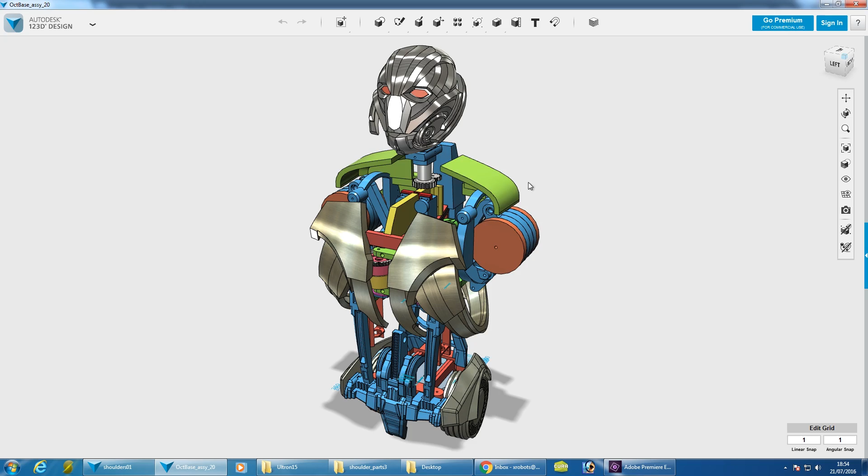First of all, I'm going to make these green shoulder parts that we've got here, and hopefully that'll immediately give it some better proportions. There's quite a lot to go in the front, the clavicle that goes on these parts, and also the neck conduits there, and I think once I've filled those in, that'll set it off quite a lot, and of course the breastbone.

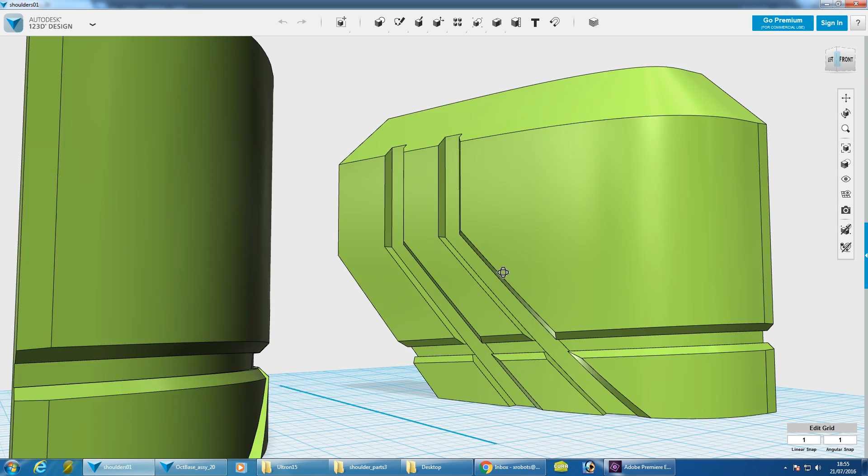So I've extracted those parts off to a separate project. I've put a bit of surface detail in them, but not too much. They are in fact partially covered by much bigger shoulder bells that sit on the arms as well, so they just need some detail to set them off. And I'm pretty sure I can print those in one piece each on 2 of the LulzBot TAZs.

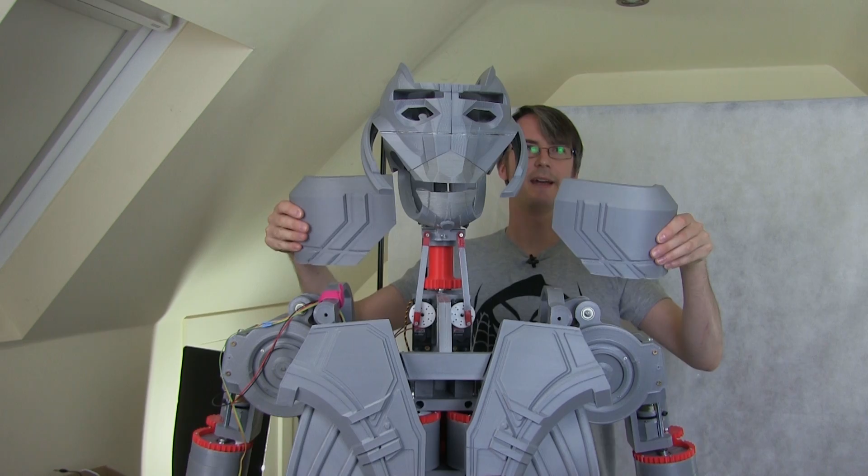Here they are. So these fit on here. They need to go slightly higher and point in at the neck. So obviously this brings up the height of this much further. So already the neck doesn't look quite so long. And as I say, there's lots of stuff in front to fill in the big gap as well. So we need to mount these on some brackets.

There's a bit of a challenge with these because these shoulders pivot around this way. And they also kind of go in, so if I attach it to the tops here, these are going to collide, because when the shoulder's right up, this thing touches the neck. So we need some means of keeping this here, but allowing it to come up, allowing this to slide up underneath it, and it also to pivot round whilst it's doing that.

So I think what I'm going to do is build a bracket, rather than picking it up this way, it's going to hinge it up from the back, possibly even on a 4-bar link that always keeps it parallel, but still allows it to pivot round at this point, somewhere near the pivot point for the shoulder, so that it can come round and go up and down without going up at a funny angle.

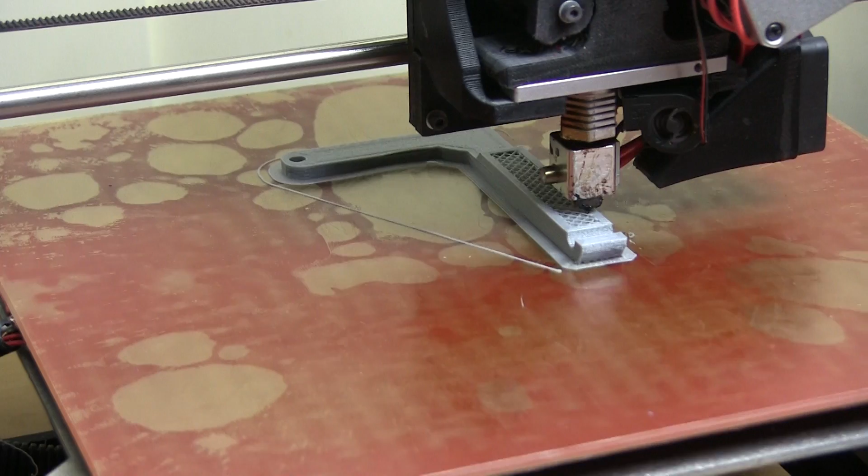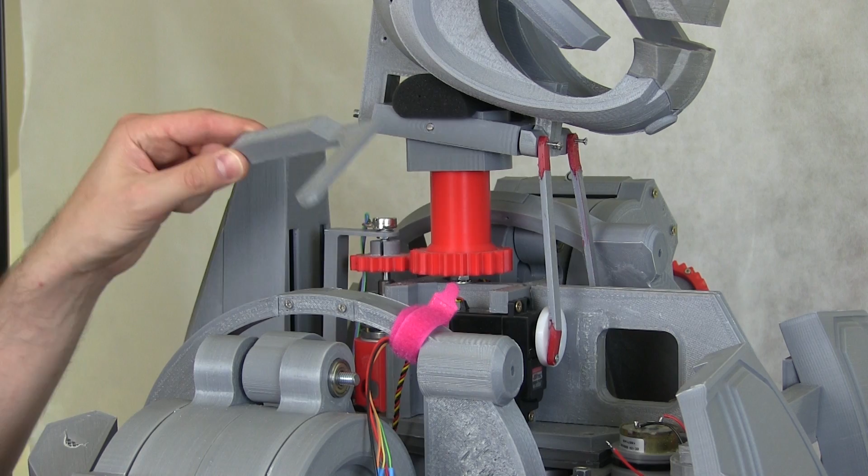I've made one bracket here which is L-shaped, and that's going to pivot off this back thing here. So that'll attach to a bracket so it can go up and down, and then obviously the pivot point in the end is where the shoulder bell part will hinge off there, so that will then be able to rotate around. So I need to make a block to hinge this part on the back here at the right spacing, and then I think that's going to be okay.

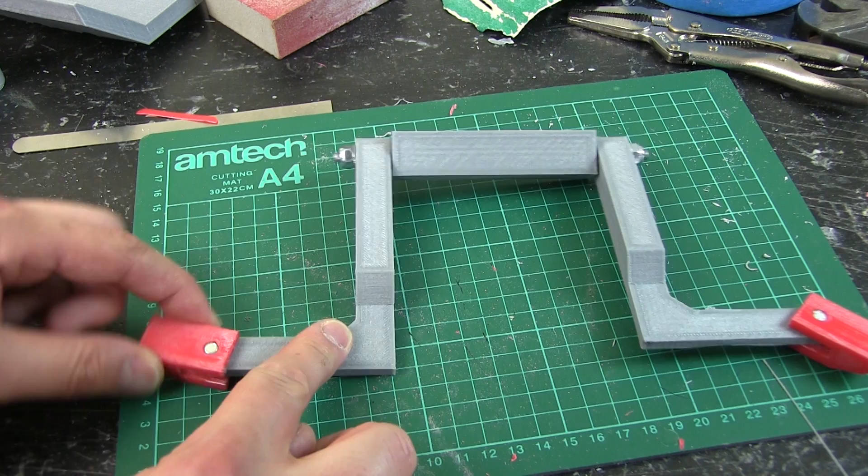I've already tried it on the other side where I've put the shoulder right up, so I can check that this can actually lift up and clear all of the mechanism. So here's the assembly. We've got obviously the hinges that go that way, and I've put these little hinges on here. These stick to the bottom of the shoulder bell parts.

So I've got these little bits of studding with a slot cut in the top that I've just screwed in. They're tight in the red part and slack in the grey part, so those should rotate okay. They're a little bit stiff, but they've got the leverage of that whole shoulder panel on. So let's get this stuck on and mounted up, and we can move the robot around a bit and see how well it moves. I fitted these on here for now with the brackets. They look alright now. It makes the head look less high. These will sit slightly higher as well.

So already the neck doesn't look so long. Obviously all the front of this is about to get filled in this episode as well. So obviously these can lift up as the shoulder raises, and they can also swivel round to track the shoulders. So if we just give one of these a shove.

Now the pivot point isn't in quite the same place, but obviously the range of motion is fine, and there are big shoulder bells that come over here as well, so that's actually going to overlap this piece, and that will be fixed on that assembly there. So what I do need though is underneath here kind of a springy piece and a channel attached to the top of this. So I've got kind of a springy stick that sits in the channel, so this will always track the shoulder there and keep that in line, and also as this raises up it won't get caught on any of the pieces underneath.

But I really like to do that when it's in motion. I may come back and do that in this episode, or it may be in a couple of episodes when I've actually got some scripts that run all the motors, so I can really see how this performs. I still have the option to change the shape and size of this angled L-shaped bracket. I could have it so the shoulders slope down more. We'll really have to see how that works when it's in motion. For now, I'm really happy to get the cosmetic parts on and build up these shoulders.

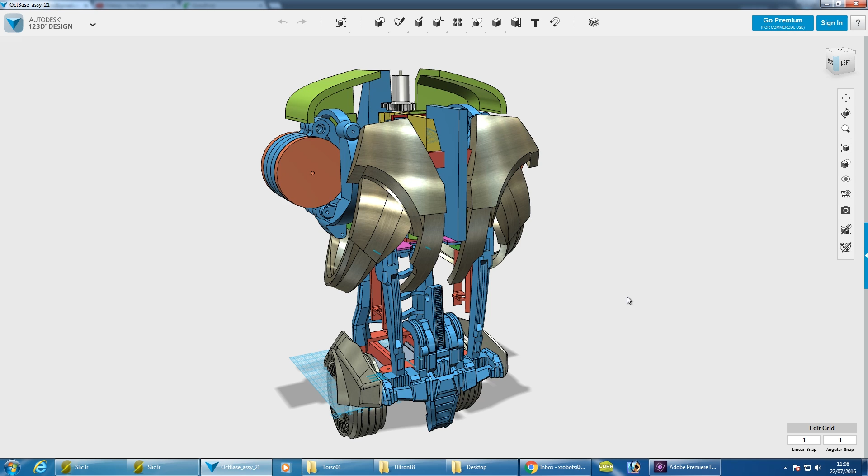And the next thing we're going to look at is the breastbone, which is of course called the sternum. So let's have a look at that sternum. We have to make a piece that fits in between the original chest plates, and I've got the model here, in fact, the low resolution version without the details on, because 123D Design handles much better if there are fewer faces. So I've basically put this block in here, which I've sized, and it's just got square edges. It overlaps the other parts.

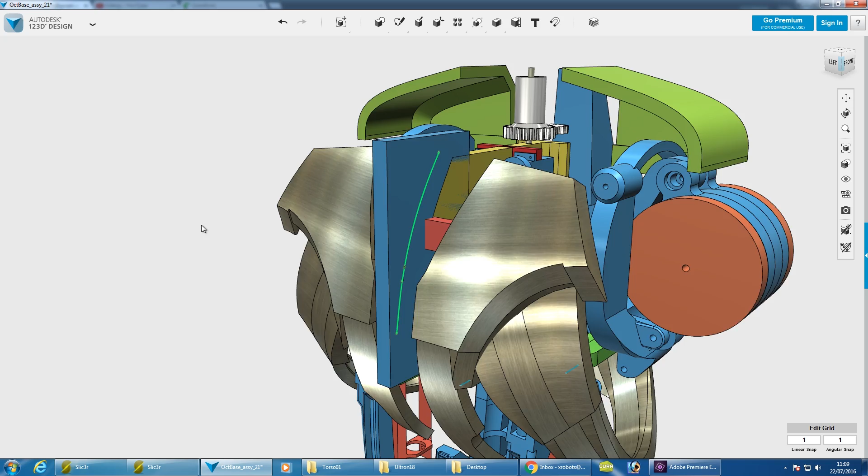What I'm going to do is use the project tool to project onto this surface with these contours, and then use those sketches to cut that line, and we can get something that's completely uniform with the front of the chest. Similarly, we can subtract these other parts and we can get that cutout piece. There it is, and I've done a bit of contouring to the bottom just to make sure that comes down to the right distance. Probably do something about this surface, but we can sort that out shortly. I've made that slightly wider and stretched out the bottom to meet these parts.

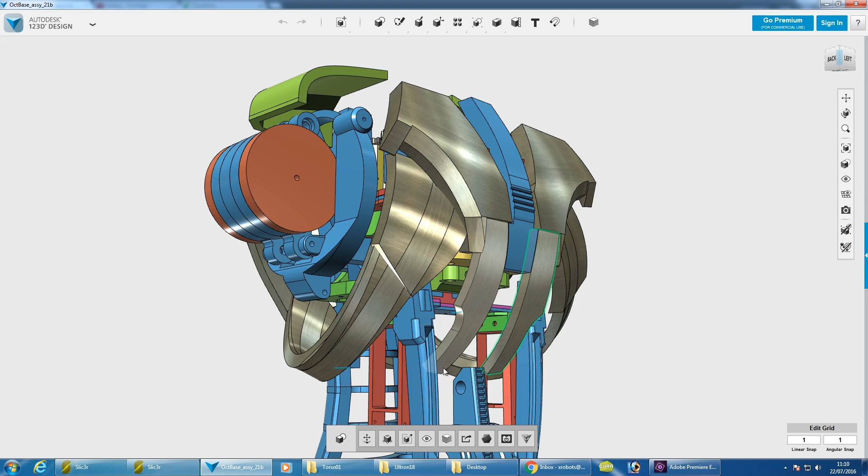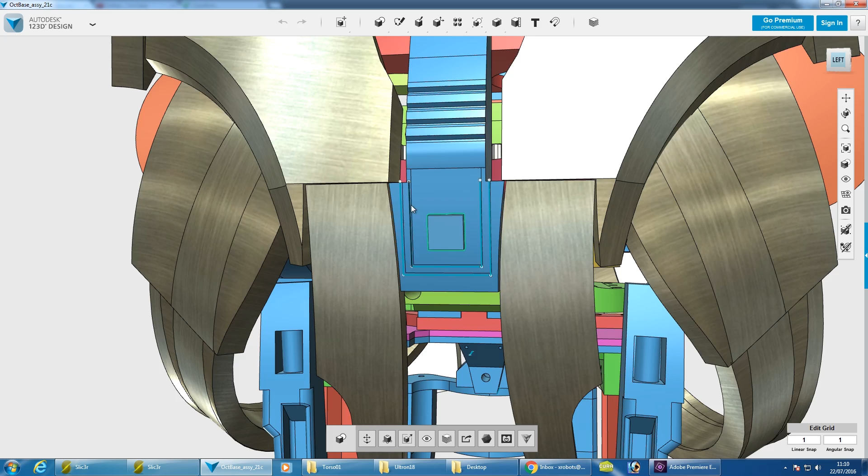Now the parts either side I haven't printed yet either, and I'm not going to do that till the robot's moving, because they may well interfere with the bottom, so I need to decide if those are on hinges or they're flexible or something else. I've put some details in here, and I did that by snapping a cube to this and using that surface to draw on. I need to do some more details, so here's the cube I've just got from the primitives menu, and I've just snapped that to the surface. Then I've used that to draw the sketches on, so you can only draw a sketch on a flat surface.

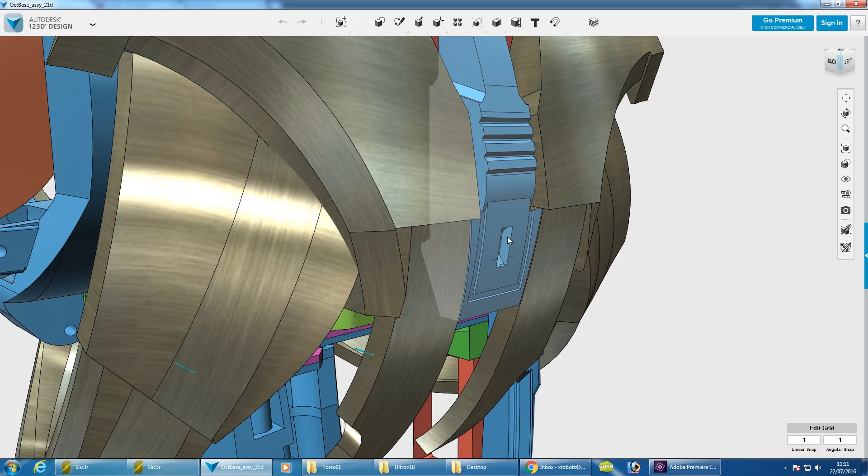So I've used that cube, you can see the sketch is slightly further away, and then I've used the split face tool to project those sketches onto the curved surface underneath, and I did this quite a lot with the other previous parts. A bit more detailing and contouring though. I've cut another hole out there and put some contours up here. I've stretched the top out here as well, and that needs to be contoured in multiple directions, and we can do that just by grabbing the corners here and chamfering those out. A few more chamfers on the corner.

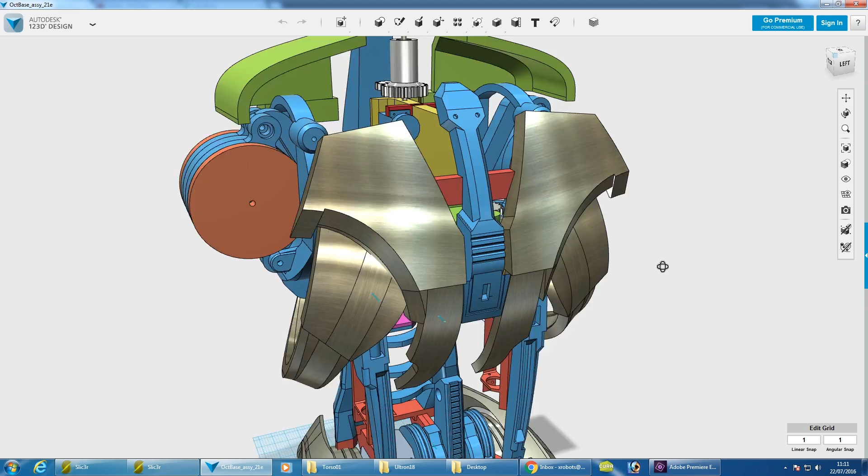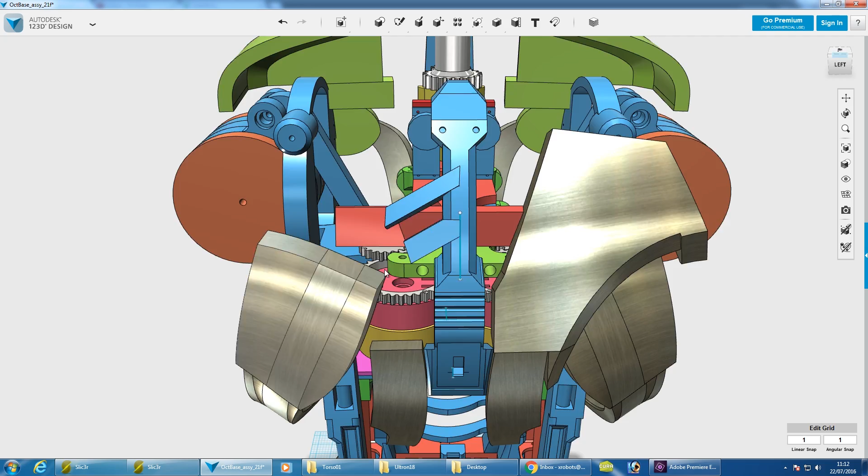I've dealt with that top piece, put a couple of holes in for features. Seems to be looking okay. There's some extra bits that go on that kind of cut down, and some other bits and pieces as far as I can see from the reference pictures. Started to position these parts, so these are at the moment independent pieces, but obviously what I'll do is subtract this part from it using the subtract tool, so I can just do this and I can cut that off so it's perfectly flush with that other part.

Those are all merged together now, and I've gone and flattened the tops off, and I did that just by pulling this surface in and out. So that's pretty easy to do to get the top there. Same with the one here. So those are all merged in, it's all one solid object now.

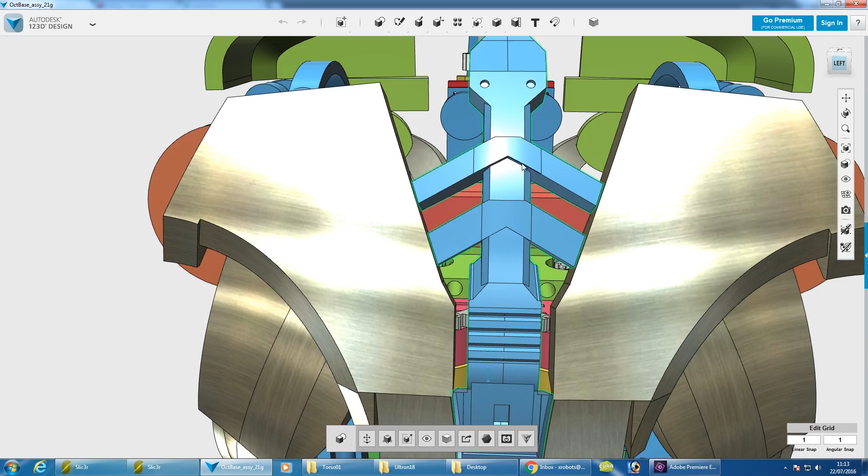And there's a few more features, and I think we'll get that printed and see how it fits before we do any more. So I've added these round things on, which are just going to be stuck on the existing chest plates. A bit more contouring up the top, a few more flat faces, and I've cut this whole thing in half, ready for printing in 2 halves.

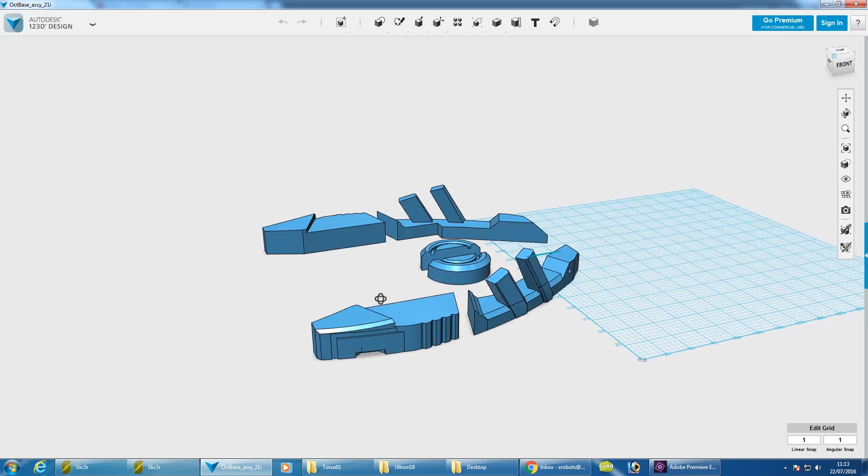Here are the parts ready for printing. I've had to cut these lengthways, and obviously stick them back to back there, so that will get printed and they'll be stuck back to back, and that's so it fits on the print bed.

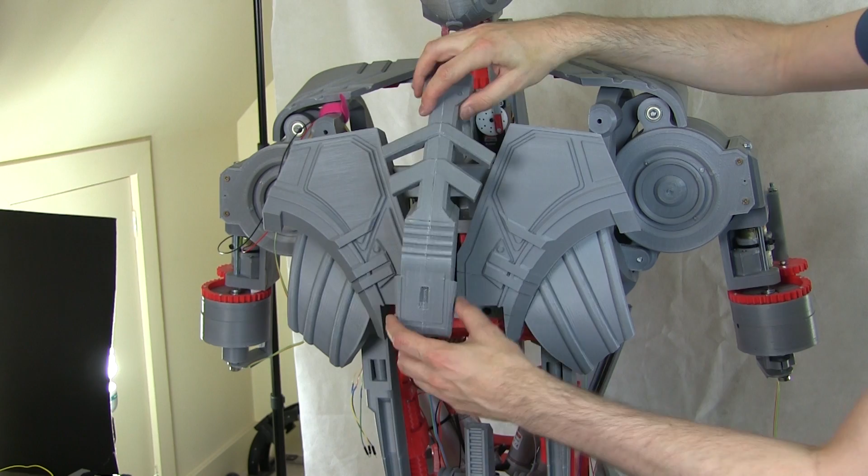Here are the parts. I've already solvent welded with acetone these parts back together, all 4 of them. So that should be our whole sternum and those bits and pieces that sit up on the top on each side. I seem to have one slight problem, which is that this doesn't fit at all. In fact, this is supposed to be below here, which is fine, but then the top doesn't fit anymore, and this doesn't fit onto here.

It wants to fit up here, and you remember I made these pieces removable, so this should sit at this height. So in fact, I think what I need to do is move these chest plates up so it fits like that. Basically, I made these removable, fortunately, and it looks like they are too low compared to the CAD by about 20 mil. So I need to shift those right up, and that's another reason why the neck might look too long. So I need to cut the brackets off the back, and then print some new ones and move them down and shift those chest plates up a bit.

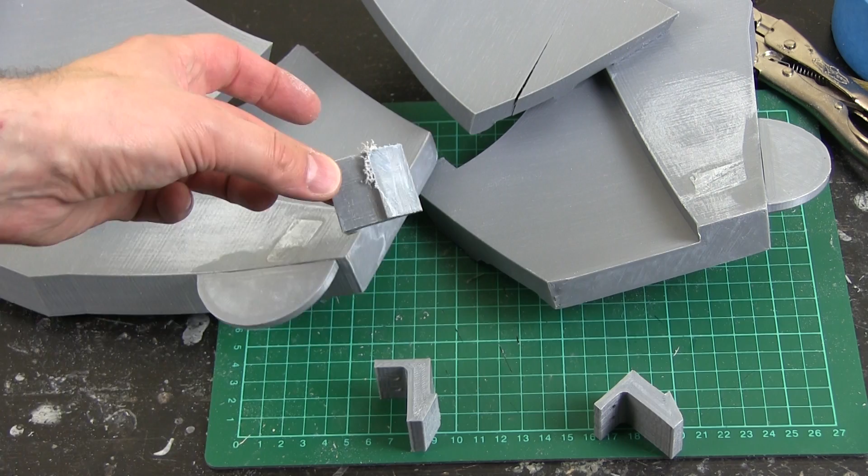I just hacksawed off the old tabs that were on there, and I've printed some new ones, which I now need to place further down so these can sit higher. I've stuck the new brackets on, so these should fit on pretty well. They should hook on and they also screw on, so let's just place those. There's one, and there's the other one.

So I've just taped this thing on with double-sided tape for now, but I think that looks pretty good. It seems to be in the right place now at least. Just need to secure these with some screws to hold them in exactly the right place, and that should be fine. Right, I think that looks okay. Can shift this around, but on the whole that seems to fit as intended.

I've designed these sections for the conduit, and they've got holes through the outside to put a bit of bungee cord through so they can be flexible. Obviously these will be stacked up. And I've also got a big hole in the middle with a gap in the back so I can easily feed wires in that go up to the head. So these can be the actual functional conduits to bring all the wiring into that head assembly.

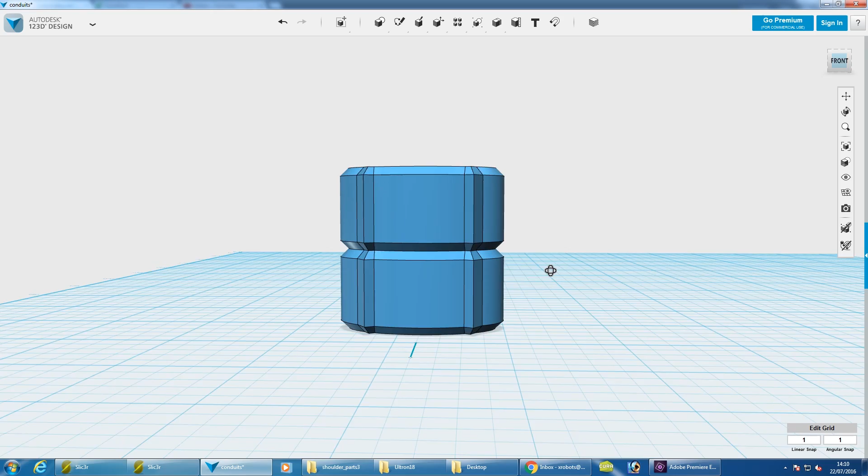So these are going to be stacked up. We'll see, print a few out and see how it goes. I'm not sure how well they're going to bend around. We might need some spacers between them, but we'll see what happens.

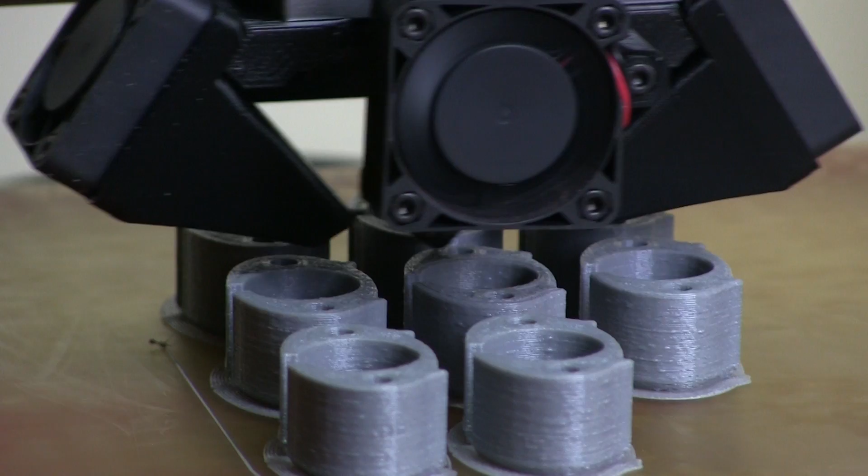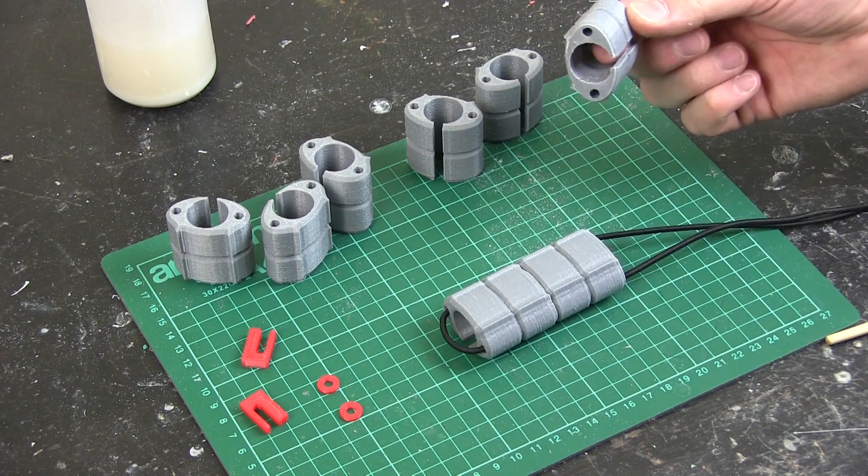The rest of these printed overnight. It took about 8 hours to do all of them. We've got 8, which is 4 for each side of the neck. So obviously the plan is the wires run up the middle, and we put some bungee cord each side so they can hang and stretch as the neck moves. Obviously these want to lock solid rather than pivoting really well, so it's going to be hard to drape them. So I've made these little spacers, which I'm just going to put on.

Something like that, so now they pivot around. Let's pull that a bit tighter. We can put more in as we wish. So I'm going to try these on for size. I've got some little hooks made to hook the top of the bungee cord to the side of the neck there, and then we need something to attach the bottom. So I've got 4 here. Obviously the groove is in the back, and this is quite bendy now.

It also twists. So you'll notice in pictures of Ultron, in fact, these get thicker at the bottom, but all I'm going to do to cheat is actually twist these so they're thinner at the top, looking from the side, and fatter at the bottom, looking from the front, and that's going to twist round and go roughly there, I think, somewhere. So I need to stick that hook on and then make a bracket at the bottom end to hold that in place and try and stylize that as much as possible. Obviously these are flexible, so as this neck moves around, hopefully they should move around and they won't get in the way too much, or if they do, they should just sort of pop out of the way.

I've installed the little hooks there, so now this should hook on there quite nicely. I want to try and keep that turned, so I might put another one on to hold it that way, but I think it looks okay.

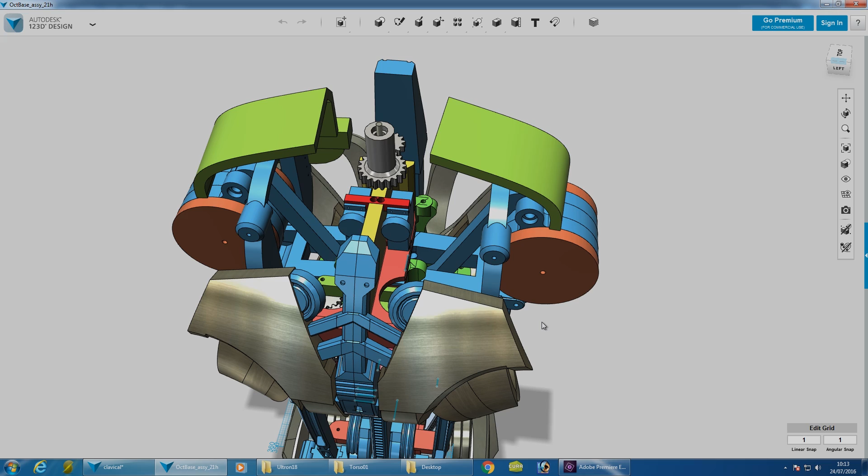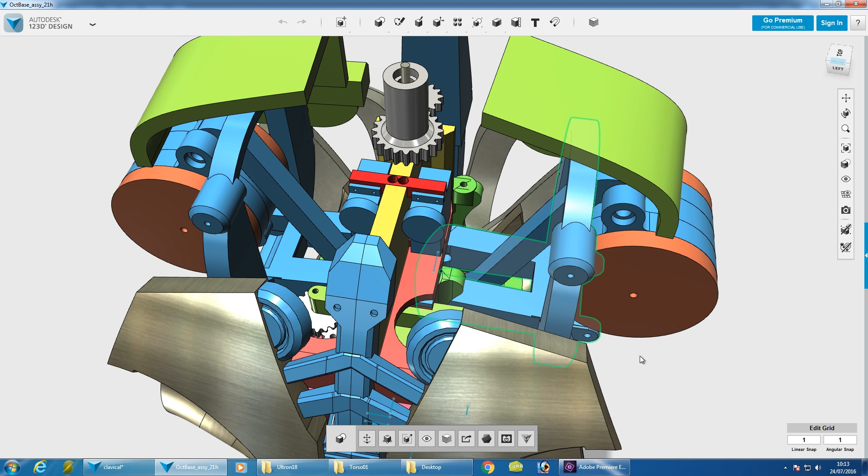from both sides. It probably wasn't clear where I was waving my hands then, but what we need is a thing that goes from this hole and comes across basically to this yellow thing in the middle, so that's going to be the clavicle or the collarbone. It's really for show, although Ultron does have one. It has no function really, and it's also a bit annoying because as these pieces fold in, obviously it needs to shrink and it needs to bend all around, so that's going to be quite challenging.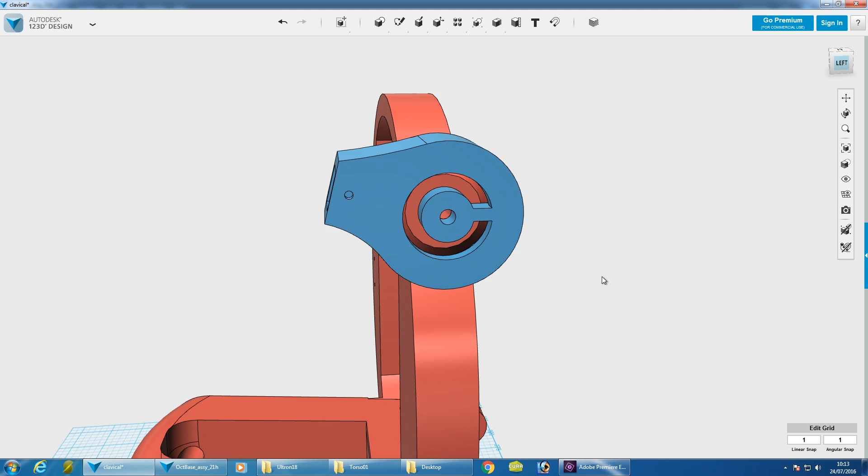So what I've done is made this part, which is going to be printed in NinjaFlex, and you'll notice it has kind of a central hub that screws onto the main bracket here, which is in red. And it's going to be flexible, of course, so that can flex all around, and it can also rotate a little bit as those fold in and out. I haven't decided what attaches to it, but we'll get those printed, then I'll have a play around with it.

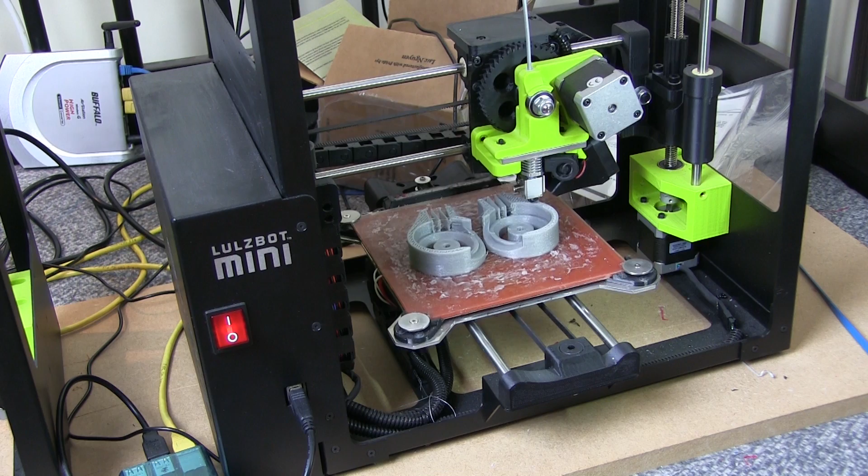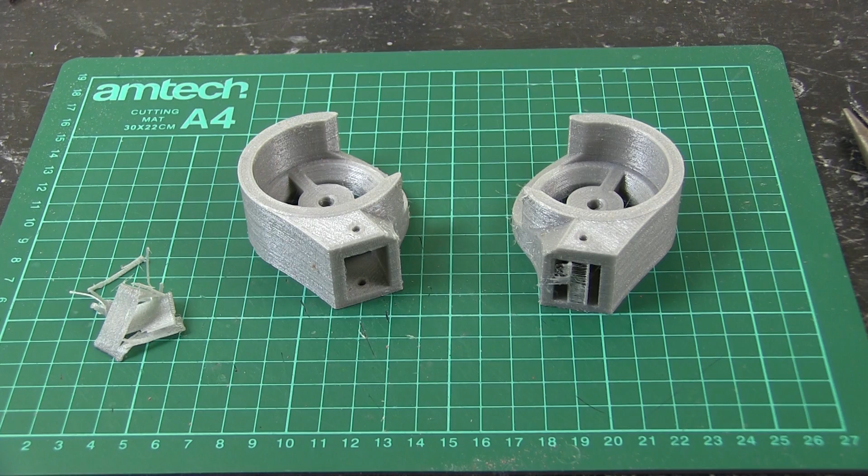So here are the parts. You may have noticed the printer was going pretty slow, and it does that for NinjaFlex, around 14 millimeters a second instead of 100. So these took 6 hours, and that's why there's no more footage, because I left them going overnight. The prints have come out pretty well. They're printed like this together, so there are some wispy hairs where the nozzle has gone between them, but the other side's absolutely fine. And this is down facing anyway, we could clean that up.

I used support material, and I've torn out the support material of one of them for the stick where the actual clavicle goes. And NinjaFlex is really tough, so I tend to use pliers to pull out all the support material if I use it on NinjaFlex. There we go. So just need to clean that up, and let's offer them up to the robot and see what they look like. I've taken one side of the chest plate off now so you can see what I'm talking about. Here's the parts.

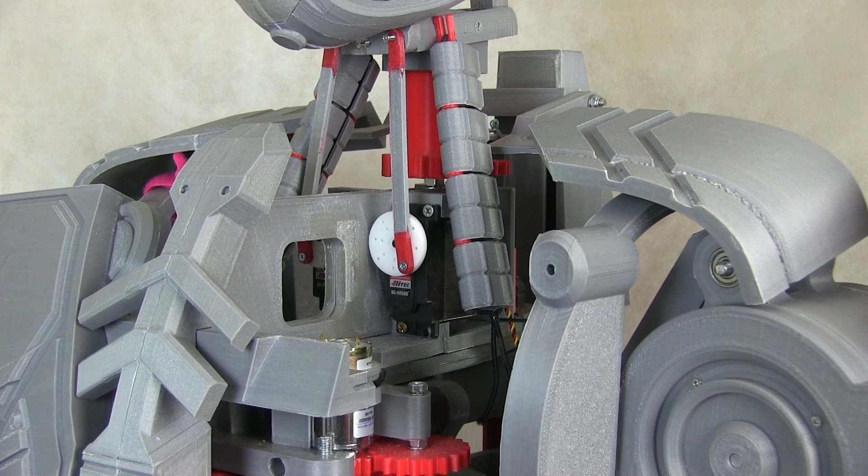Of course the middle of this is flexible because it's NinjaFlex. So that's going to screw straight onto the hole there. So this thing can rotate around, and also it can bend in all directions. And then we need to decide what comes across here. But as I say, this whole thing lifts up, so we need to be quite careful. And we also need to make sure that it works with this. So I think that, as I say, it might be a kind of combination piece that holds the bottom of this and is attached to this.

I've just moved one shoulder up here so we can see that now this is a bit hectic. So what I was going to do was get the conduit piece there and attach it to the other end of this clavicle on a little thing so it all moves together. But actually it's all going to have to kind of squish, and the clavicle is going to have to go behind here, which is where it should be anyway. So I think I'm not going to make anything too clever. Cosmetics are for cosmetics and not for practical reasons.

So I'm going to put a stubby little stick in there with a scoop that can scoop behind this as this pushes in. And these conduits are going to be attached to the inside of the chest plate, or the top of it here. There's another feature that should be there. And that's going to be about it really, and hopefully as the arm moves and the head turns these things will just squish around and everything should be fine. Here are my little clavicle sticks.

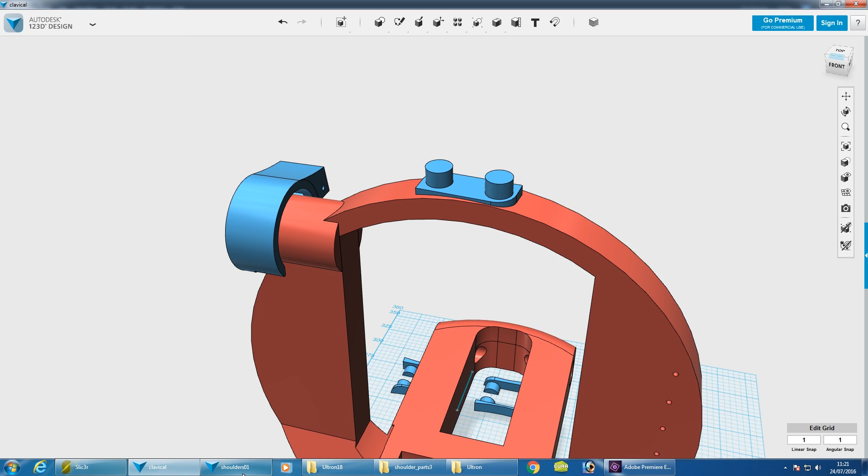They're only 50mm sticking out of that rubber piece, and the top is a scoop shape, as I say, to fit behind the neck conduits. I've also started to work out about the sliders for the shoulder bells. So I'm going to stick these things on top of that shoulder mechanism. So the shoulder bell will have a stick underneath, which looks like this exciting item, which will slide between those two lumps. Now to print this without support material, I've actually cut them in half and made opposite ones.

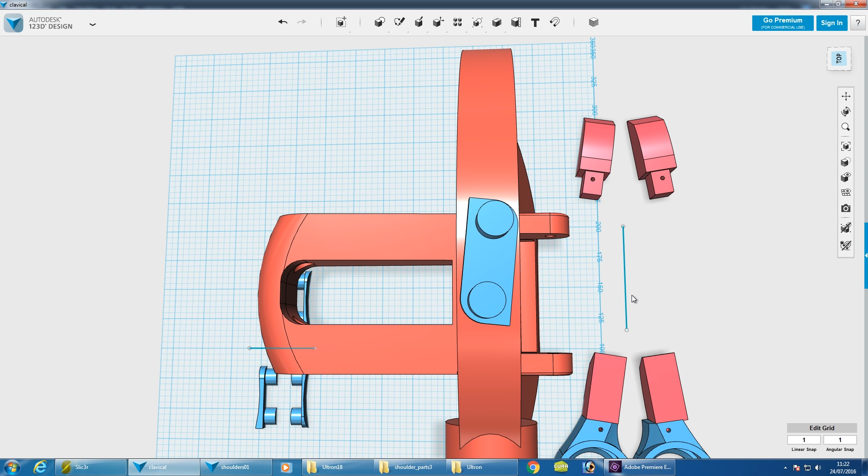And you'll notice that those are aligned slightly, not completely straight with it, because of course the whole thing moves forward, so that's going to be biased towards the forward angle. They're also sloped slightly outwards because of course this lifts upwards, at which point they'd be pointing in a lot. So I've given that a bit of thought, and then obviously I'll print them in two halves without support material and stick them back together. So hopefully that should enable the shoulder slabs there to slide neatly over that mechanism. Then we can test the whole thing together.

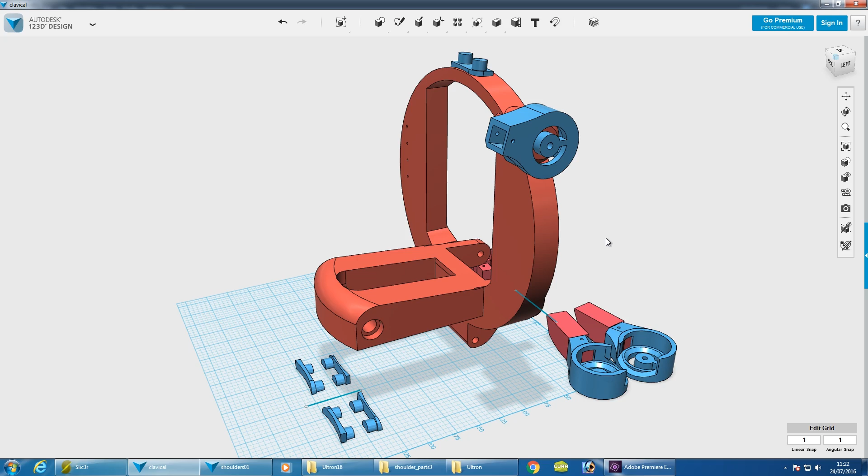I've plugged those bits of clavicle in. It's a shame they don't go all the way, but obviously when this hinges up it does. So we've also got these sliders under here now, so I've put these in and I've put the lumps on top of here, so that locates in there okay. There's a bit of wobble in all of these. I may bungee these to the middle so they're constantly stretched and it holds them tight, and I may bungee these down so they're kind of held and they don't wobble around.

But essentially this now moves with the shoulder, so if I give that a turn there, we can see this tracks around and that thing stays between the lumps. So that seems to work pretty well. Let's just try and put that back. There we go, and back again. So now I want to go and get these and attach them to the front of the chest plate so they come just in front of the chamfer that I put on. And then we should be all sorted out, and we'll see how well this shoulder moves as well. I'm hoping these rubbery things and springy things will all just play nicely together, hopefully with the clavicle pushing behind this as it closes up.

I've just put more hooks on the back of these things and bungeed the other end of those to them. So there's a bit of wobble, but they're not too bad. So now we can try putting the arms up and down, and hopefully these track properly and they go behind there and everything works. Although I do think I need to bungee these probably together or to the middle part to make them track properly. Well, almost. Definitely need that bungee to help that track and to help it guide behind there. But on the whole, that seems all right to me. In fact, that's further than I intended it to go. Let's put it down again, making sure that stays in its runner. And that's pretty much the end there.